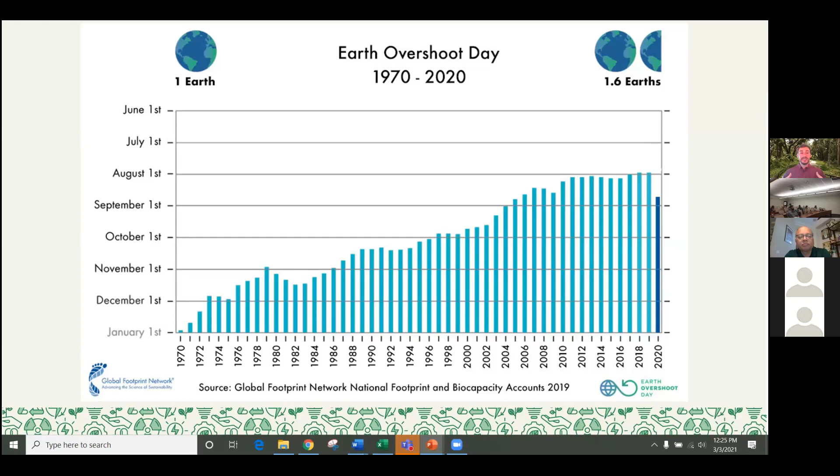Even during COVID-19 and the global pandemic last year, Earth Overshoot Day was around August 22nd. Every day after, from August 23rd to December 31st, we were literally taking resources from the next generation to meet our present needs. So when we talk about sustainability, it's about finding balance, going back to a future where, as we continue to grow, we utilize the resources that the Earth can naturally replenish, and in fact move not just to sustainability, where that balance is, but continue to move in that spectrum towards regeneration and restoration—moving to a future where we actually contribute in a more positive way to these natural resources and natural systems than we consume every single year.

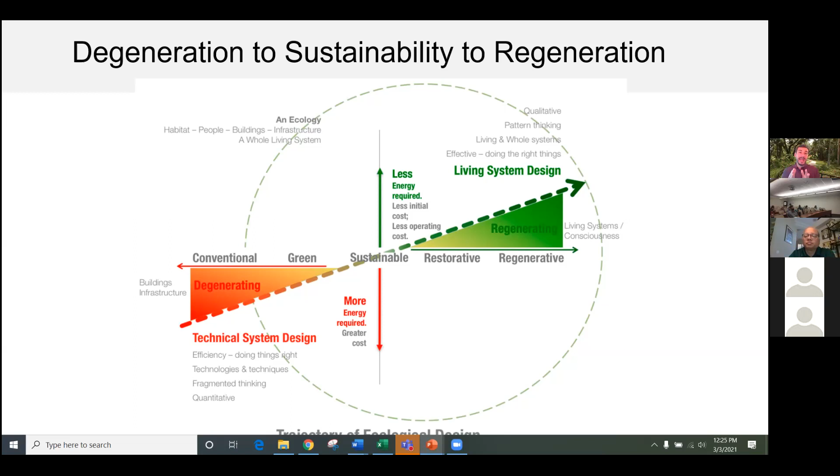And this is the spectrum that we're in, right? We've been in a conventional, degenerating form of an economy. We've moved towards green over the last 10, 15 years. Now we're moving towards sustainable and beyond.

As practitioners, we are taught to look at things through this triple bottom line lens: people, planet, and prosperity, or social, environmental, and economic reasons. True sustainability is finding the nexus between all three of those factors. That's really what we're about.

It's also critical for you all to realize that there is this global standard for sustainable development that was developed over the last decade, but really launched in 2015 by the United Nations and over 193 countries, who said let's come together and identify goals that all nations can work towards in order to end poverty, eliminate inequalities, and protect ourselves from the threats of the climate crisis and environmental crisis we're facing today.

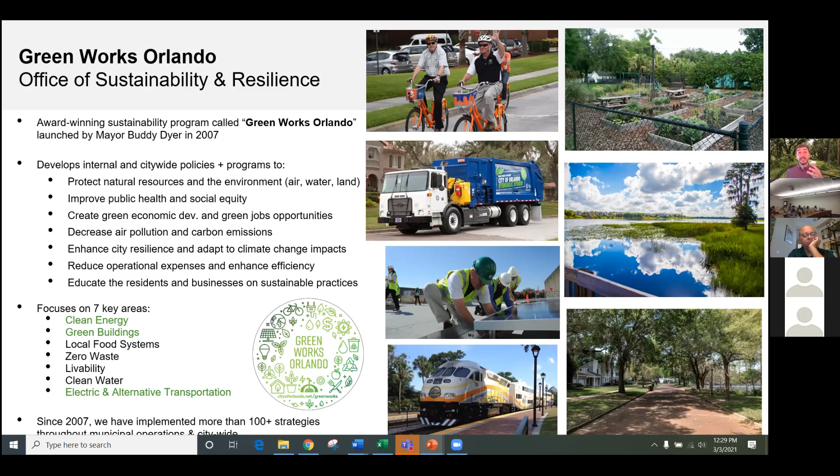You've probably heard of smart cities before. Well, we decided to coin this program Future Ready, because ultimately what we're trying to do is make sure Orlando is ready for any future advancement in technology, any shock or stressor that hits our city, and making sure we're more resilient as we move forward. The Future Ready Master Plan did a great job outlining how to use technology and data analytics to advance these goals.

Everything that we do in the city is focused on using data to drive policy and decision making. And one of the important data points that cities are beginning to look at is their greenhouse gas emissions footprint, essentially their carbon footprint as an entire city.

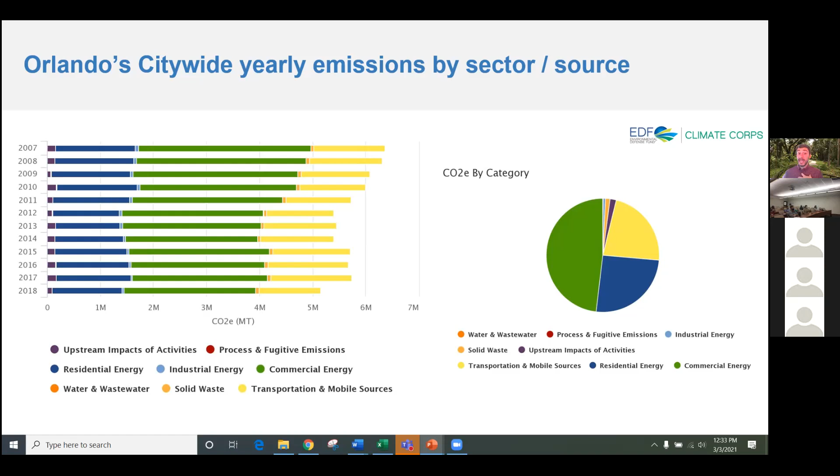So this gives you a snapshot that buildings and transportation are the vast majority of an emissions profile of Orlando, and many cities around the country, looking very similar to what we're seeing here.

I also wanted to quickly share from a US perspective, this graphic by Lawrence Livermore National Lab is super eye-opening. It is the estimated US energy consumption in 2019. And the fascinating thing is it points out on the far left all of the primary energy sources that are inputs into our system, our society, our economy.

So you can see things like nuclear, solar, wind, geothermal, also natural gas, coal, petroleum, primarily going to transportation sector fuels. Then it points out the 4 sectors of the economy that demand that energy every single day: residential buildings, commercial buildings, industrial buildings, and transportation. When you actually look at the energy consumed, it falls in those 4 buckets.

What I find fascinating is that 2/3 of the primary energy that we're consuming to do work actually goes to waste, primarily wasted to lost heat, which we don't do a very good job at recovering and reusing. So 2/3 of the energy that we're consuming to heat and cool our homes, to power industry and manufacturing, to move people and goods in our cars is lost.

So we have a super anemic system, we're very inefficient. And one of the big global trends that we're seeing is electrification. We're beginning to move towards electric vehicles, electric HVAC systems, electric hot water heaters, and we're moving away from on-site gas systems.

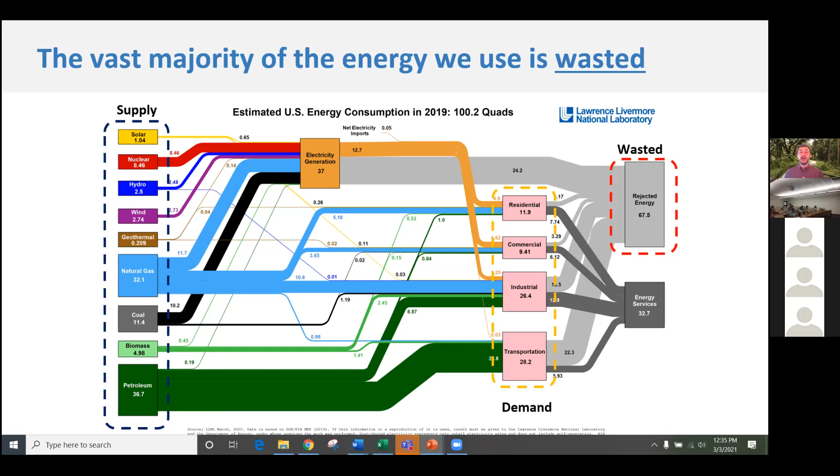And how does that relate to carbon emissions? Well, as you can see, the renewable energy systems have little to no carbon output. Of course, that's the benefit of renewables. And then you can see that the majority of the carbon is coming from natural gas, coal, and petroleum.

What's fascinating is, similarly, it helps us identify what sectors of the economy are contributing more to carbon. As you can see there, transportation actually breached electricity generation in 2018, just 3 years ago, in terms of the amount of carbon it contributes, because electricity has been decarbonizing from coal to natural gas just because of market forces.

We have hydraulic fracturing come in the early 2000s, and all of a sudden natural gas prices drop, supply increases, and you start to see a natural transition away from coal in this country and even other parts of the world.

And then, of course, there's the actual externality of the carbon emissions associated with running our economy. We, by the way, contribute about 17% of global climate change emissions. Now, of course, the United States and our growth through the industrial revolution over the last 150, 200 years has contributed more than any other nation to date. And from a per capita standpoint, we're still pretty high up there.

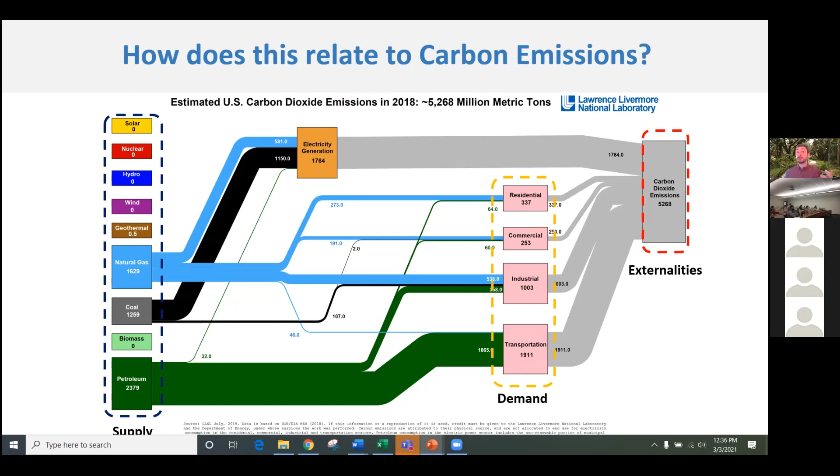The first is reducing building energy use and accelerating more energy efficiency on the demand side. Secondly, we need to decarbonize the electric grid and increase renewable energy adoption. Third, we have to still encourage people to use alternative forms of transportation, because it's not enough for every vehicle on the road to be electric. We need to figure out ways to get people to use micromobility, public transit, and others to minimize vehicle miles traveled in our cities.

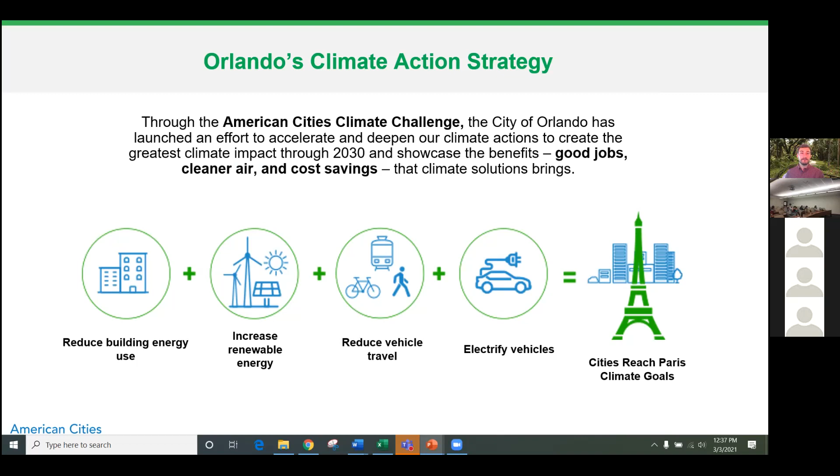And lastly, we need to electrify transportation. It's that simple: moving away from dirty, polluting sources of energy. So what I wanted to do is dive in very quickly to each one of these strategies and open it up at the end for some Q&A as well.

So the first one is around green buildings. It's important to realize that cities are often in control of their own municipal building code. For us in Orlando, we've set a stretch code beyond the Florida Building Code that requires LEED Silver certification for all new city buildings that we build. Everything from the Amway Center to the new soccer stadium to the fire stations, they're all built to LEED Silver or above—most of them are actually LEED Gold.

We do this because it's the most fiscally prudent and responsible thing to do as government. In the grand scheme of things, only 25% of a building's cost is spent to build the actual facility, and 75% is to operate and maintain these systems over the lifetime of those facilities. So it makes no sense for us to build to what I call the worst building you can build by law, which is the Florida Building Code. You cannot get worse than the Florida Building Code.

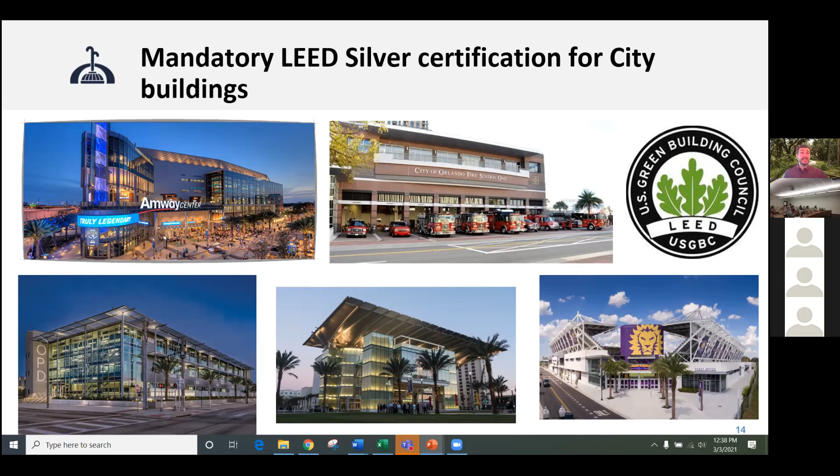So instead of building to the building code, we're going above and beyond to ensure higher performance of our buildings, which saves taxpayer dollars because they're more efficient, they use less utilities, and therefore cost less to operate over their useful life. In addition, they have great environmental benefits, productivity, and indoor air quality benefits. And of course, today in a pandemic world, green buildings are critical.

Now, it's not enough to just build new buildings to be high performance. We also have 7.2 million square feet under management that has already been built, and most of them haven't been built to the LEED standard or above. So we've started to retrofit our existing buildings, going back and changing lighting to LED, adding building automation and control systems (BAS) throughout all of our buildings, and also retrofitting HVAC and service hot water.

This has led to significant reductions in energy use and cost. We did a $17.5 million green bond in 2017, and since then we're saving $2.2 million per year compared to the 2016 baseline. We're using those savings to pay the debt and interest on the green bond, plus the excess savings of about $250,000 to $300,000 per year is being recirculated into a revolving energy fund.

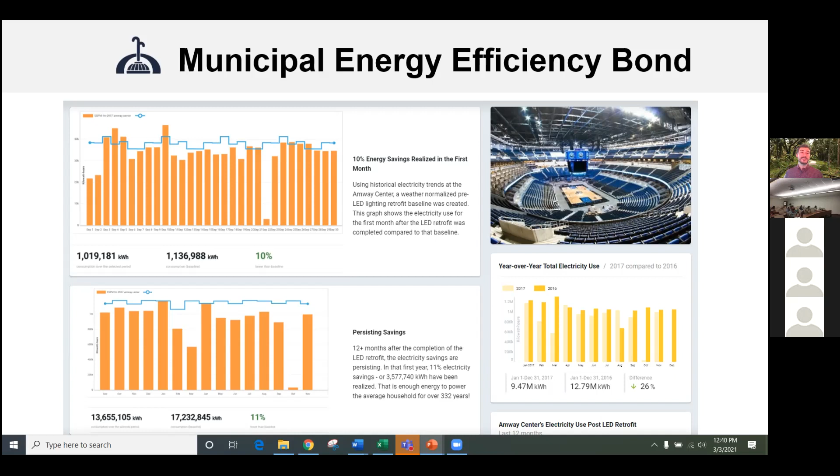So we're basically doing an in-house energy savings performance contract, ESPC, which is a popular strategy for buildings to go through retrofits. But instead of hiring a private company, we self-performed that effort and have shown significant savings as a result. The other question, from a policy standpoint, is how can cities really help move the real estate market to be more efficient?

Imagine having an energy gauge, not just for your hot water heater or your laptop, which is now readily available, but for your whole building, so that the next time you want to rent an apartment, you're not just thinking about the cost of rent, but also the cost of utilities and the total cost of living. We often forget that.

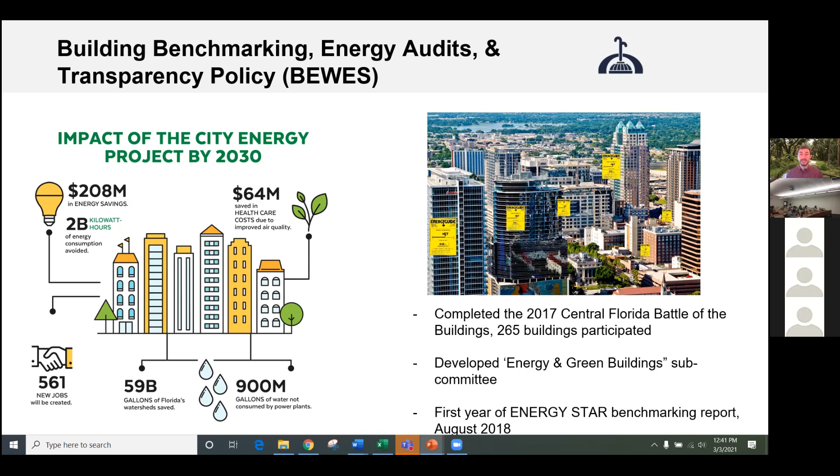Since 2017, Orlando has had this policy. About 1,000 buildings per year are required to benchmark and report, and we take that data and make it publicly transparent. We're beginning to see interesting analytics from the data in terms of which building space types have the greatest carbon footprint, which have the greatest energy use intensity, EUI, and how we start to target programs to those consumers, those energy hogs and large energy users, so they can minimize their consumption, lower pollution, and save themselves money.

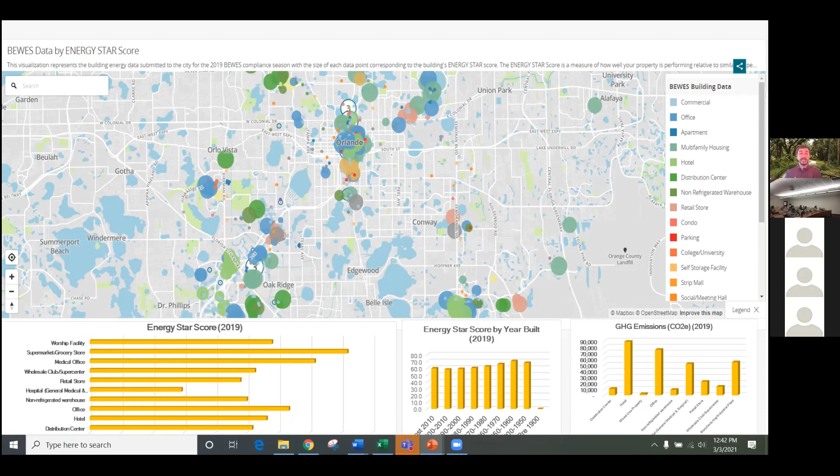So the next slide is a short video clip that shows you an example of an affordable housing project where we were able to make great improvements.

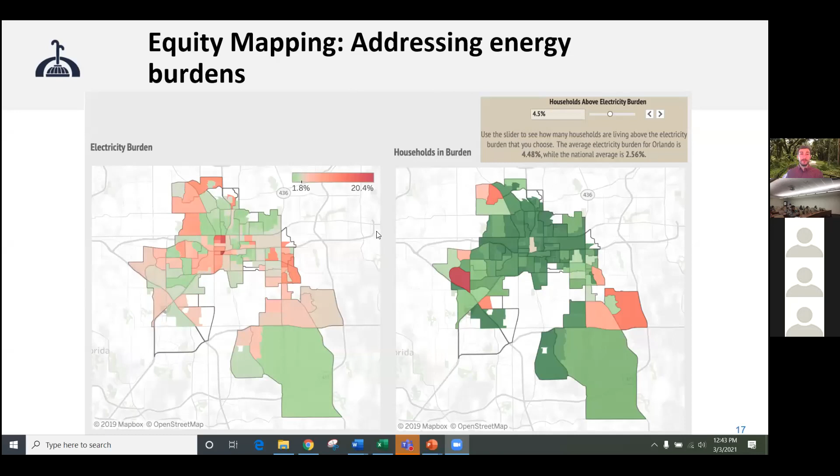That's a good example, because tenants who live in this apartment complex after these retrofits are saving between $400 and $600 annually on their utility bills. That's a lot—between $40 and $60 or so per month that people are no longer having to spend on utilities, that they can put towards meals to feed their family, medical expenditures, and other quality of life improvements. So it's really about driving efficiency on the demand side.

Clean energy is going to be the next move. I often say we have to reduce, then produce. The most cost-effective way to transition to clean energy is to accelerate energy efficiency, lower your demand as much as possible, and then begin to switch over to renewable energy. Now we're making the switch from demand to supply.

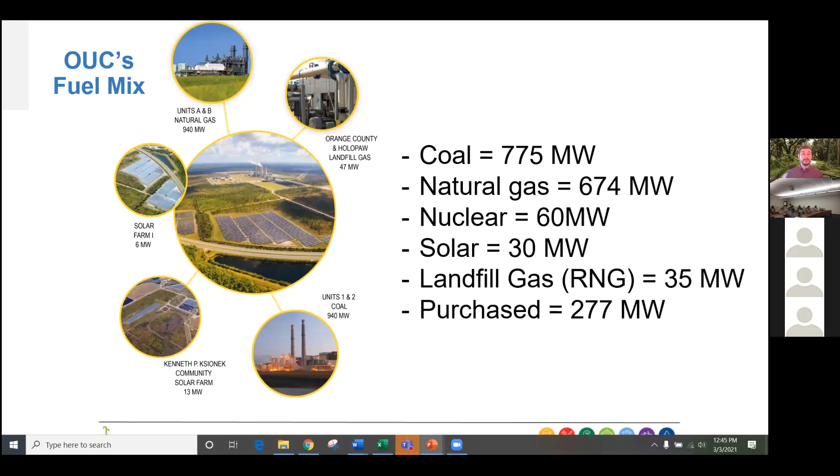One of the things we're focused on is how to make the switch away from the energy that built our world, fossil fuels, to the energy that's going to shape our future, zero emission sources of electricity. In 2017, Orlando set policy that commits us to moving our city operations to 100% renewables by 2030, and the entire city, citywide, by 2050. Every hotel, every theme park, every resident, moving forward towards being powered by renewables.

Now the question is always, that's great for a city to make that commitment, but what does your utility think about that? There's a lot of cities subject to investor-owned utilities like FPL and Duke Energy that don't have to report directly to their residents, since their shareholders are investors, so they have a different perspective. There's a lot of cities in Florida that have committed to 100% renewables, but they're subject to FPL, Duke, TECO, and other IOUs in making that decision. Luckily, Orlando does have a little bit more control.

In December, our utility came out with a very bold plan, what they call an Energy Integrated Resource Plan, or EIRP. The IRPs are scenario forecasting exercises that look at what the future fuel supply is going to be for the electric grid. After robust community engagement, OUC came out committing to net zero carbon without carbon offsets by 2050. We're going to set intermediate CO2 reduction targets of 50% in 2030 and 75% in 2040, and we're going to end coal-fired generation in Orlando no later than 2027, with significant reductions in 2025.

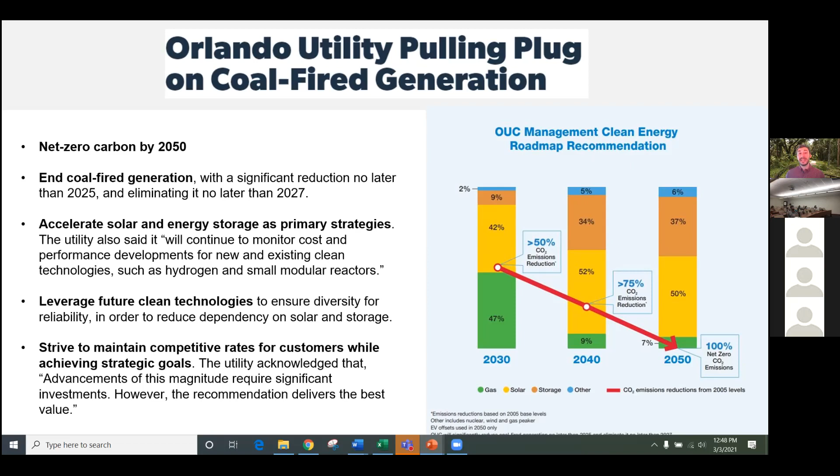Now, in order to get there, we have to start to map out our community's potential generation. We've worked with Google Project Sunroof and a group called GreenLink Analytics to map out every rooftop in Orlando and figure out not just which rooftops are theoretically possible, but which ones are economically feasible, and also the adoption probability of that economic feasibility.

What we saw was 92% of rooftops in Orlando get enough sun throughout the day to make the economics work for solar. That's about 2 gigawatts of capacity, 1.9 thousand megawatts, which is basically double what Orlando needs to meet our energy mix today. We use about 1.2 gigawatts of electricity generation capacity today to meet our needs. And that's saying rooftop solar alone, not carports, not ground mounted, not floating, just rooftop, is about 2 gigawatts of potential.

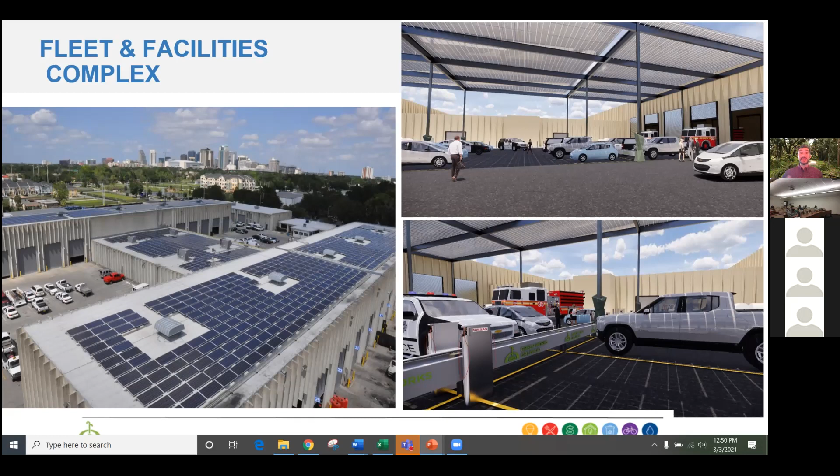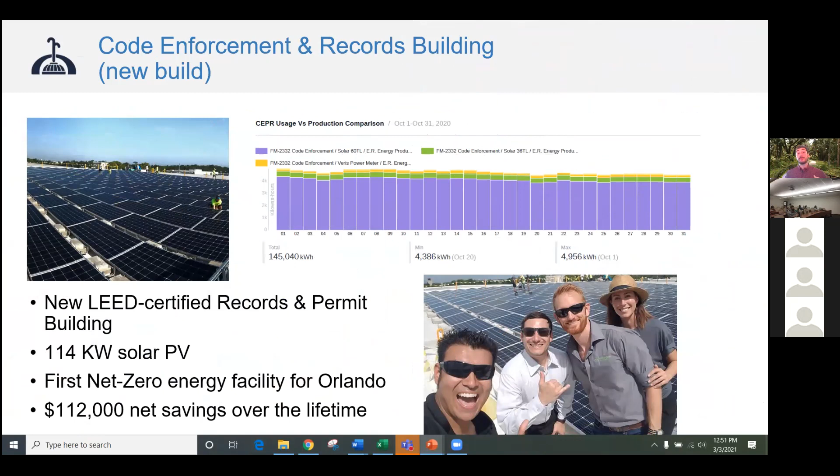There's so many EVs now in our fleet that we are needing an entire lot just for electric vehicles. This is another building actually showing that we hit net zero for the first time this past year, meaning we produced more electricity on the rooftop than we consumed.

From a city's perspective, we've also been helping our community adopt rooftop solar through programs like solar cooperatives, or solar co-ops for short. These are group buying programs where residents interested in going rooftop solar join a co-op, basically join a group, and that group goes out to the market to request solar installers. So they go out as a team, as a group of homeowners wanting to go solar, and that helps achieve better economies of scale.

For the contractor that gets selected, they can actually go and bulk purchase panels. Instead of it just being one home, there's 100 homes that want to go solar, and that leads to better price points.

We've seen solar co-ops started in 2016 here in Florida. I sit on the founding board of this organization. It's amazing what we have done across the state. In Orlando, we've done several megawatts just in the last 2 years, 1.5 megawatts, but close to 3 megawatts since we started this of rooftop solar capacity. And these are small 10 kilowatt, 8 kilowatt systems on average, so you can imagine hundreds of homes have gone solar just through this co-op program.

Now the challenge is that more and more people are actually moving towards multifamily. We have more than 50% of residents in Orlando living in apartments, condos, and townhouses, and as a result they often don't have the same rooftop to add solar. So the question becomes, how do they go 100% renewables?

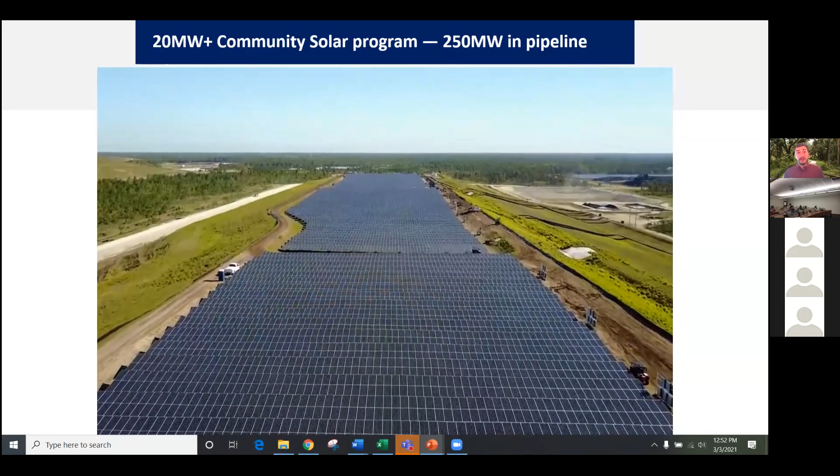We've started to now roll out a community solar program where residents can tap into these larger solar farms that we are now installing and operating, and they can virtually subscribe from their one apartment on the 15th floor of a downtown apartment complex, and offset 100% of their consumption from these solar farms.

We now have over 150 megawatts of solar capacity in our portfolio. We have another 150 in development that will be done by the end of next year, end of 2022. And we're beginning to see a pretty drastic amount.

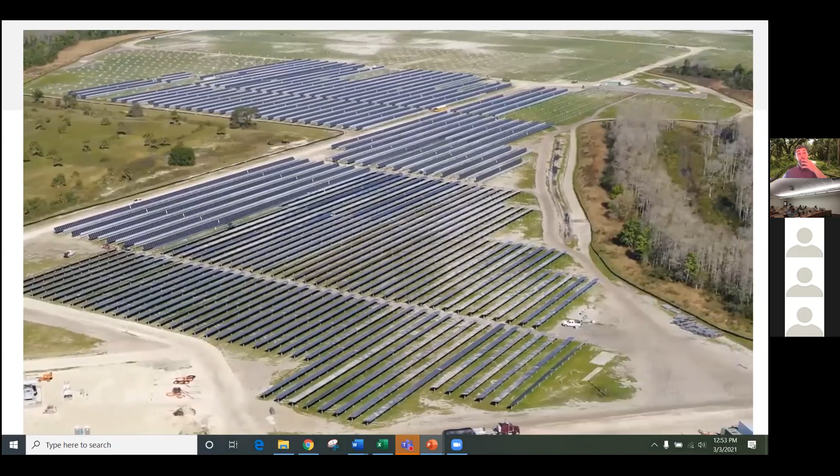It's funny because people are asking, what's the cost for these types of large solar farms? And the cost happens to be undercutting new natural gas combined cycle generation, and definitely new coal, new nuclear. They're basically the cheapest form of new power generation, which is why these utilities are putting them in, because they're going to be printing money. That's really what it comes down to. They're not putting them in because they want to save the planet, I can tell you that. They're putting them in because it's actually better for their pocketbook.

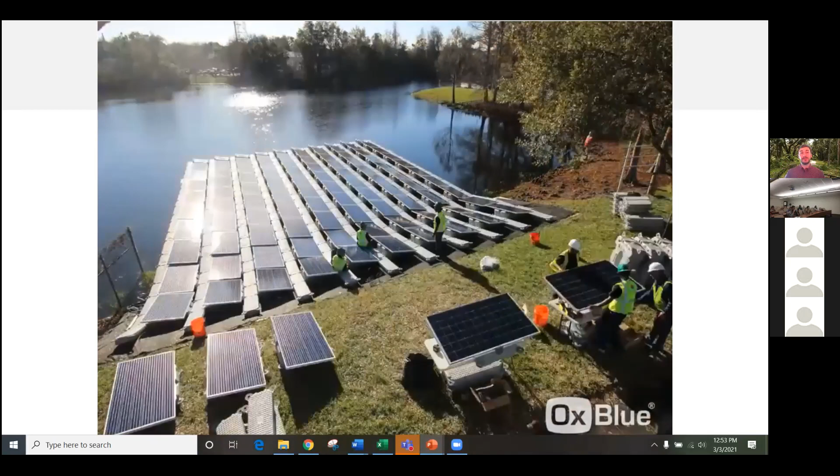And what you just saw there was an example of floating solar. We're beginning to look at a new application for solar in this region. Orlando is a national test site for NREL, the National Renewable Energy Lab. We're working with NREL to research the efficiency improvements, the unintended consequences of floating solar on potentially the water bodies or surrounding aquatic life. We're starting to really look into this as a scalable solution.

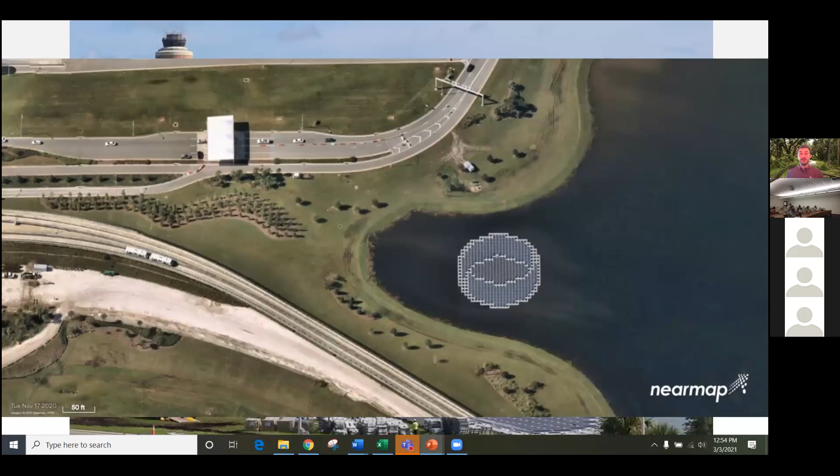At the Orlando International Airport, we now have a floating solar array in the shape of Orlando's logo, and people can see that from the people mover, the autonomous tram. So we're really moving in that city-of-the-future vision quite rapidly.

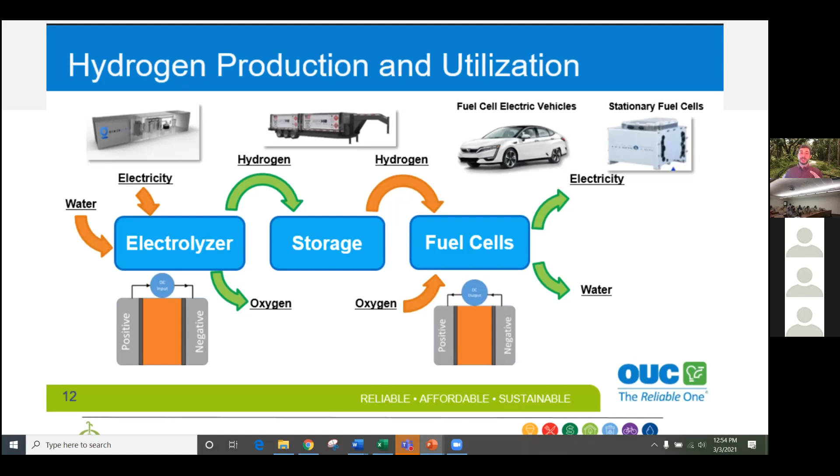And the last thing on energy, just real quick, is hydrogen production. We're beginning to do a whole research project of a nanogrid using hydrogen, green hydrogen, to deal with the intermittencies of solar and renewables. So essentially we have floating solar that's going to be electrolyzing water, splitting water, storing hydrogen in these H2 tanks that you see there. And then those tanks are going to be going into a fuel cell, and that fuel cell is going to be creating electricity and helping to true up the generation curve of solar as cloud cover comes over, or as we have a longer-term storm that we may need to weather over time.